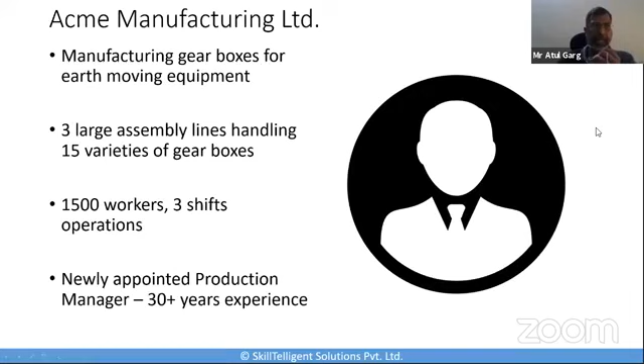So before we start with this whole Acme Manufacturing Limited case study, let us also try to understand what is a shop floor. We will also talk about what is to be managed on the shop floor, how do you manage it, and we will also touch upon some shop floor metrics to monitor. Okay. So before we start again with Acme Manufacturing, let's understand what is the shop floor.

In simple terms, shop floor is an area in a manufacturing facility where assembly or production is carried out either by an automated system or by workers or a combination of both. The shop floor may include equipment, inventory, and even storage areas. Shop floor may have 1 or more assembly lines, processing equipment, material handling system, and so on. That's how we normally define a shop floor. And this is a view of a large company's shop floor.

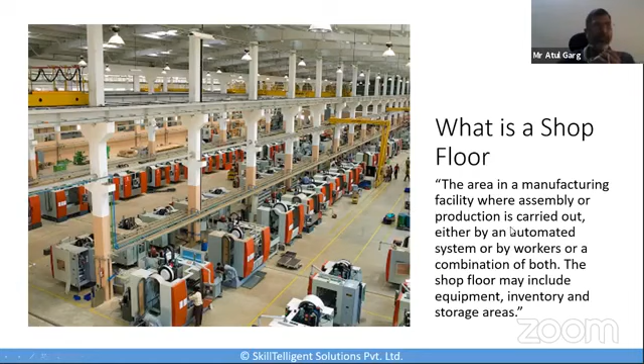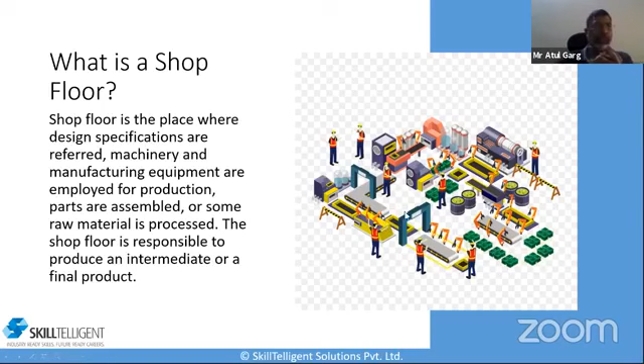Further, shop floor is also a place where the design specifications are referred, machinery and manufacturing equipment are employed for production, parts are assembled, or sometimes even the raw material is processed. So the shop floor is responsible to produce an intermediate or a final product. An intermediate could be a part, component, sub-assembly, anything which is not a final product yet. So that's what we call intermediate. So this is about a shop floor.

Let's also look into the types of shop floors, and we will generalize over here. A shop floor could, from the product quantity perspective, handle either small volume production or mass production. Shop floors are also designed from the process perspective to support either assembly, analytical, synthetic, or processing activities. Now, the analytical process would involve breaking a basic raw material into components which can be used independently. For example, a refinery would break down crude oil to get aviation fuel, petrol, diesel, etc. That's an analytical process.

Shop floors are also laid out either for the job shop, which is project-based or work order-based, or from the process flow angle, which is where you have continuous manufacturing happening on a mass production basis. So this is how we normally define the shop floor types.

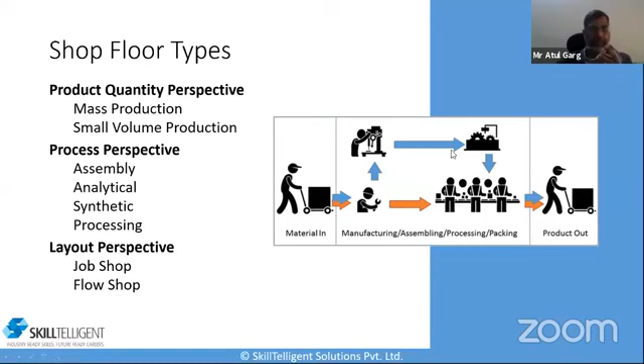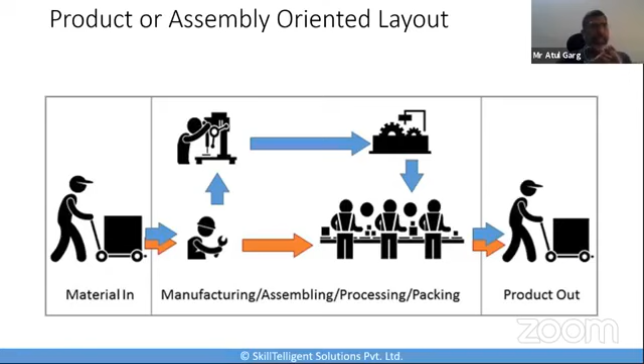A quick orientation to the shop floor layouts. This one which we are showing over here is an assembly or product oriented layout, and this is designed in a linear fashion. The next one which we have is a process oriented layout where a group of machines and tools that perform similar or all functions required to complete a single stage in a process are placed together in this layout. Okay.

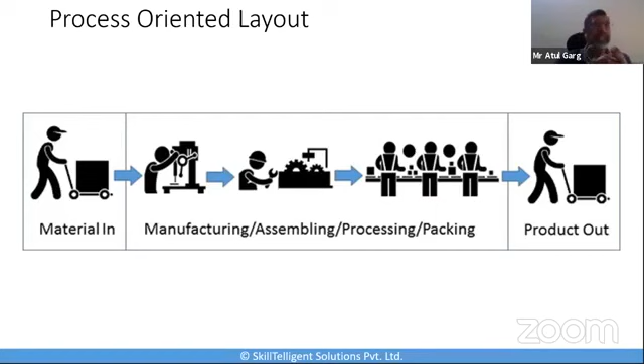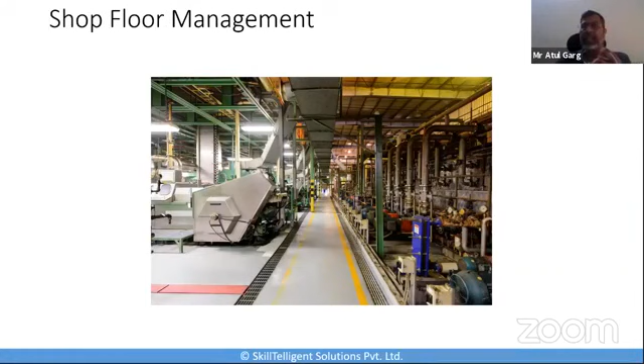So let's understand what is shop floor management, because shop floor management is concerned with several activities that enhance the shop floor efficiency. So keeping it simple, shop floor management shows us the ways to economically manufacture products of certain value and quality in certain volume and a certain time period. The process and practices involved in shop floor management help in containing wastage, costs, and standardizing work to ensure the timely delivery against the committed quality and quantity consistently.

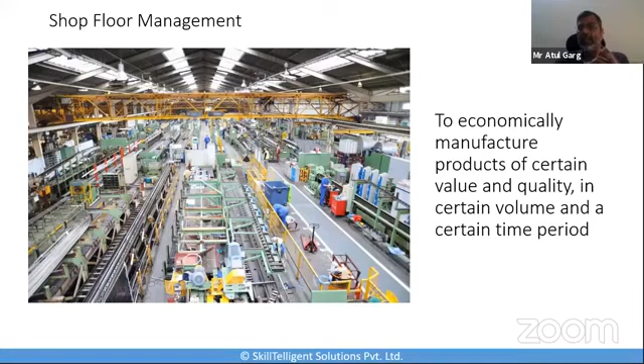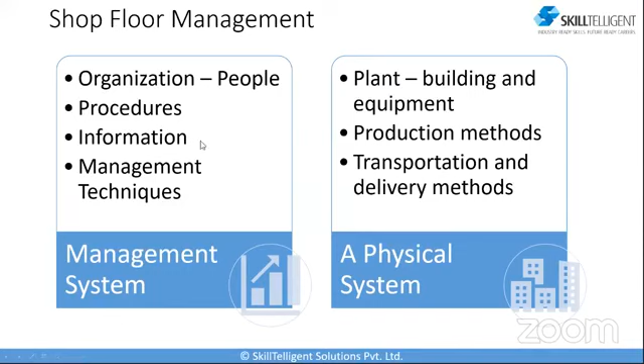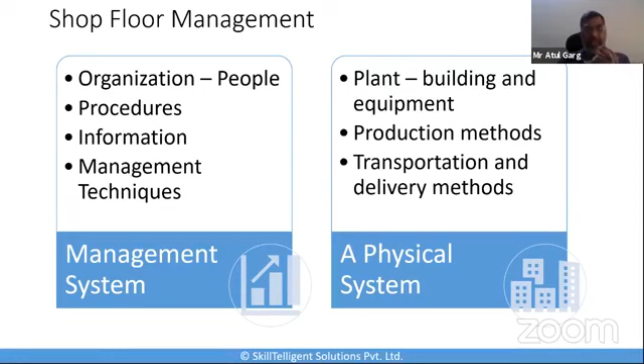Shop floor management overall is also about developing and controlling a management system and a physical system. So management system would focus on the organization involving people largely, procedures, information, and management technique, whereas the physical system would focus on plant, building, and machinery, production methods, and even the transportation and delivery methods. So that's how we distinguish between the shop floor management, one from the management and second from the physical system. And once you have these management and physical controls in place, it becomes very easy to manage the shop floor. Okay.

Let's look at some of the objectives of having a shop floor management. Why do we want to have the shop floor management? So first objective, routing and movement of the material on shop floor appropriately. Second is, how do we sequence the procedures and processes taking place on the shop floor? Third, how do we schedule the workforce, resources, and operations? Fourth, finding the deviation from standard procedures and processes, which is very important. And the fifth one is identifying the loopholes in the shop floor communication.

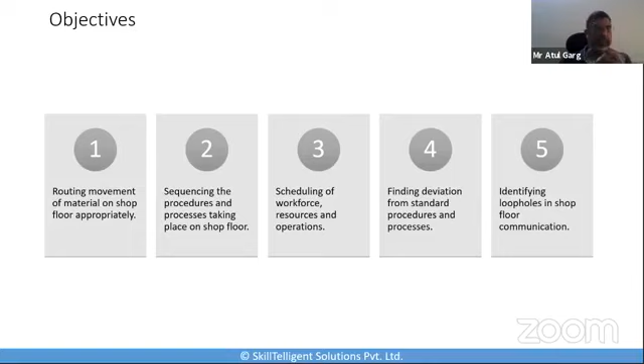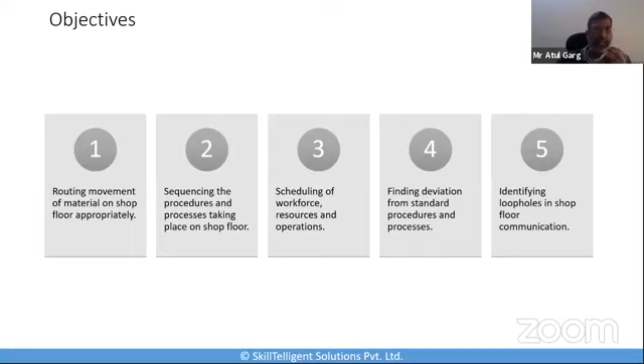Now, these are very important factors, and these are the reasons why we want to do the shop floor management. Even if the communication is not happening properly between the management and the workers or among the operators, the production can be disturbed badly. And if there is a deviation from the standard procedures and processes, it can lead to substandard manufacturing or maybe even delays in the manufacturing. Now, taking a context back of our Acme manufacturing, the new production manager whom we have hired over here would want to focus on all these objectives, because all of these objectives can impact the delivery schedules, and that's a major constraint to Acme manufacturing.

Okay, so if you have a good shop floor management system, what are the benefits? So first benefit is that it increases the operational efficiency because it uses the standardization of operations. And second, it helps in reduction in occurrences of errors in the work. Lesser number of errors occur if there is a standardization of the operations. And it also identifies and reveals the loopholes in the production processes, where again you can take corrective steps. All this always leads to the increase in productivity of the staff, and if all these things are happening by default, there is a positive impact on the revenue of a manufacturing business. So these are the benefits of having a good shop floor management system in any company.

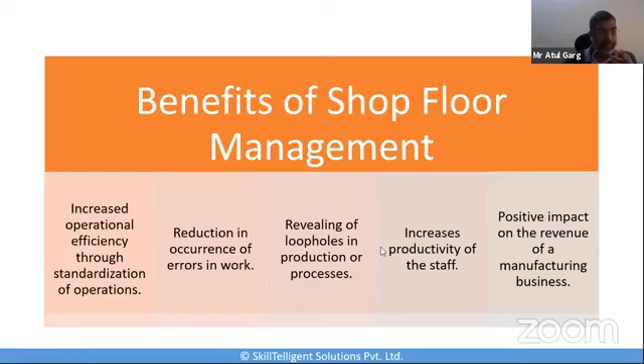Okay. Let's also understand the role of a manager who has to carry out the effective shop floor management in context. And let's again take a reference of the production manager over here. So production manager essentially has to perform certain roles. Let's look into what they are. Now, the production manager has to ensure, and he also knows well with his long and rich experience, that unless he facilitates the decision-making process at the lowest possible level of the organization, things will not move fast. And in the previous webinars, we have also talked about how the planning should be centralized, with inputs from all stakeholders, but the decision making should be decentralized on the shop floor, because this enables the effective and fast turnaround response to a situation.

Second, a manager or supervisor must lead the problem-solving activities in a multi-skilled and cross-functional team environment. This is also very important. This enables the effective and fast turnaround response to a particular situation. Okay.

The third thing is that the manager also has to ensure that for everything there is a well-defined standard process. So a manager's role essentially in shop floor management will center around these three principles. Decision making at the lowest possible level of the organization; he has to facilitate that. He has to lead the problem solving activities in a multi-skilled cross-functional team environment. And he has to ensure a well-defined standard process. Okay? So that's a manager's role in shop floor management.

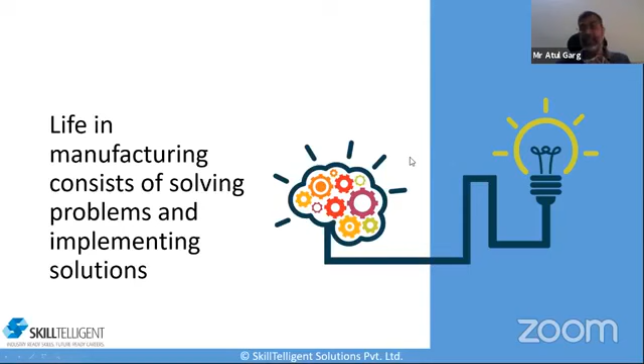So it's the inquisitive nature of the manager taking a structured questioning technique which will help him to find out what is happening and what is not happening. Okay. Remember that when it comes down to the shop floor or manufacturing, life in manufacturing is always going to consist of solving problems and implementing the solutions. Problems will consistently remain there, and you have to consistently find the right kind of solutions and one by one keep on eliminating them. So that's again a very important role for the manager.

Our production manager here has got a lot of experience, and he has learned lean. So he wants to implement lean practices at Acme Manufacturing to address their problems. He knows that when properly used and applied, lean transformation will lead any company to higher profits, greater business success, stability, growth, and profitability. Lean transformation is also a cultural change. It takes time and internal acceptance to build the right culture. So the manager has to very diligently work upon implementing the lean culture and bring about a change of culture in the organization to take it forward.

What is lean transformation? Lean transformation is essentially a practical management system based upon the Toyota Production System philosophy, where we say the customer is first, people are the most valuable resources, Kaizen, the continuous improvement that has to go on, and remain shop floor focused using Gemba. So that's lean transformation as TPS suggests. It is also a collection of best knowledge. Which are those? The business philosophies, operating principles, lean tools, and lean methodologies. So a combination of this practical management system and collection of best knowledge together is lean transformation. And that's what our production manager wants to implement in shop floor management here.

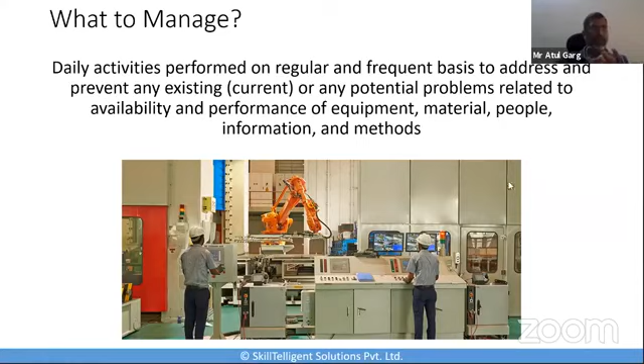In our case, our person decides to take three main steps to identify what has to be managed in Acme Manufacturing. The first step in shop floor management, especially for a new production manager, is always to understand the current processes happening on your shop floor. You just can't parachute in and say that you want to change everything, because things are already happening. You can only bring in incremental and correct changes, but you can't just trash everything and restart from the beginning. So our person starts with the 7 areas, and the first area he focuses upon to understand the current systems is safety.

He wants to understand the safety requirements in existence. Is it a safe place to operate? Is everybody following the safety regulations? That's the first area which he focuses upon.

The second area which he focuses upon is what is the work cell. He wants to understand and identify the cell layouts, number of machines and their functions, identification of number of operators and their responsibilities. He wants to understand the whole flow, the whole way in which the work is organized on the shop floor. So that's why he wants to understand the work cell.

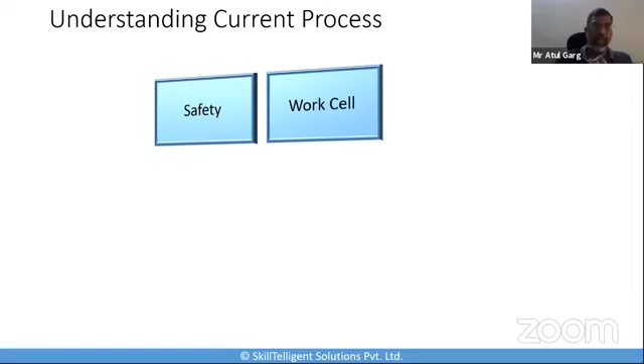Third, he wants to understand the manufacturing process. What type of gears are being manufactured and assembled in this particular work cell? What is the flow of work? What is the flow of the information? What kind of manufacturing systems are put in place, and so on. So that's the third area which he wants to understand on the shop floor.

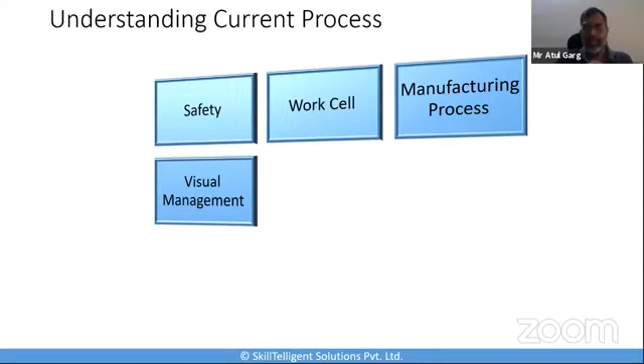Fourth, he seeks out what kind of visual management is in place and whether it is operating properly. He wants to review them for simplicity and ease of understanding, as well as whether they are being followed by everybody on the shop floor. A good visual management would cover the key control indicators for safety, quality, delivery, productivity, cost, and people. So he wants to review the existence of the visual management system.

And since this is all about managing the shop floor, stability of the resources, methods, processes, and machines becomes very important. So it is important that there is some kind of workplace organization method like 5S, so that the shop floor is stable. So again, he wants to review what kind of workplace organization methods have been implemented in Acme Manufacturing.

Sixth point, he's curious about how the information is communicated to the operators, whether there is any common information center where this information is put up, what the communication mechanisms are for letting the operators know, and how the details are shared with everybody involved in the manufacturing operation.

The last area of understanding is how the work cells are managed. He wants to understand how the work cells are operating, how people identify problems, and whether the work cell is managed in such a way that if there is any problem, it becomes visible, people are able to recognize it quickly, and the concerned supervisor is able to address it immediately. So that's the seventh area which he wants to understand.

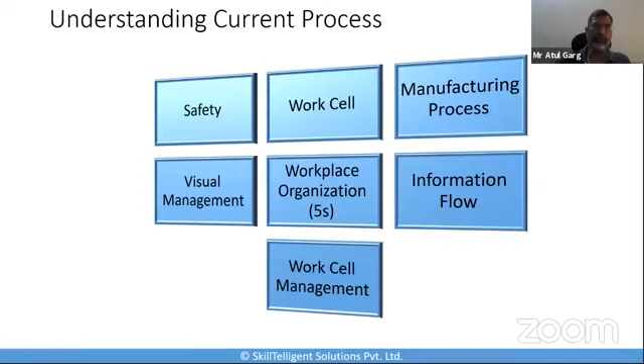So safety, work cell, manufacturing processes, visual management, workplace organization, information flow, and work cell management. These are the 7 areas where he focuses to understand the existing and current processes on the shop floor. So this is process number 1, which he goes through. The second important area is that

for any leader or any lean leader, what is important is that you should be able to go and see, ask why, and also show respect for the people who are working. These are the 3 principles on which lean leadership is built. Now, if you go and see, what do you go and see? What do you ask? So what is important here is that

in any manufacturing, over a period of time, waste generation starts taking root. Certain wastes happen as a habit, as part of a process, and so on. And sometimes even the flow gets disturbed. So it's very important that whoever is the leader or the manager of the shop floor has an eye for identifying the wastes and the disruptions to the flow of operation.

So it's very important that while he is focusing on multiple things, our production manager also focuses on discovering if there are any chronic wastes related to the standard 8 types of lean waste. What are those lean wastes? We'll just have a quick view of that.

The 8 lean wastes are defects, overproduction, waiting, unused talent, transportation, inventory, motion, and extra processing. I will not get into these 8 wastes right now, but these are the 8 wastes which happen on any shop floor. And that's what our production manager has to monitor, finding out whether any of these wastes are happening, at what level and in what quantity.

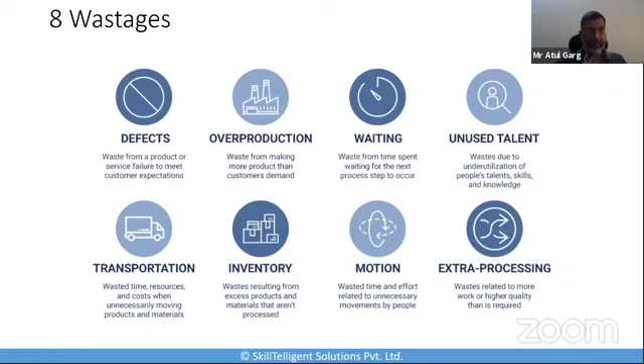Okay. Now, the other thing which he will also look into is that he has to focus on the type of the work being done. Whatever work we do, it has to be value-added work, because that's what increases the value of the product from the customer's point of view. And if you are doing any incidental work which does not have any value attached to it, but rather has a cost, we should work upon minimizing that.

Okay? If we have a higher value-added operation in completed work, then it brings a high level of production efficiency. So if you see over here also in the green, there is value-added work, there is some kind of waste or muda, and then there is some kind of non-value-added work. So our production manager's goal has to be to identify what the non-value-added work and the waste are and try to minimize them. So he has to have an eye for the wastage and identify that.

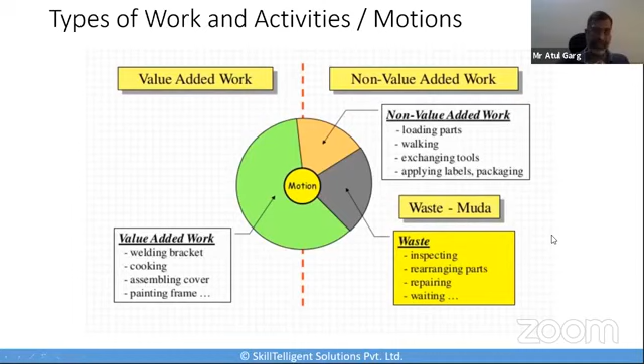Okay. The next focus as part of the eye for wastage and flow would be on the flow of production. So production managers should see if there are noticeable stops in movement of operations or movement of products and material, and whether the machines are working full-time properly or not. Elimination of stops and waiting time in a process is always a major concern of any shop floor manager.

The shop floor manager would always want the time for any individual person or an item to move from the start to finish of the process to be the shortest possible. Flow is all about how people, information, and materials move and interact with each other from the start to end of the production process.

Okay. The third area of focus would be the pace of production. You have to know whether the takt time is visible and whether everybody is following a pace of production. So what is takt time? Takt time is essentially the maximum amount of time in which a product needs to be produced in order to satisfy the customer demand. And we normally say takt time is scheduled production time in seconds divided by the total customer requirements.

What does takt time do? Takt time essentially creates a pulse or a rhythm across all manufacturing processes in a business and synchronizes the processes to ensure continuous flow of production and utilization of capacity. Once the pace or takt has been determined, the next major step is to design a system that flows product at the same rhythm as that takt.

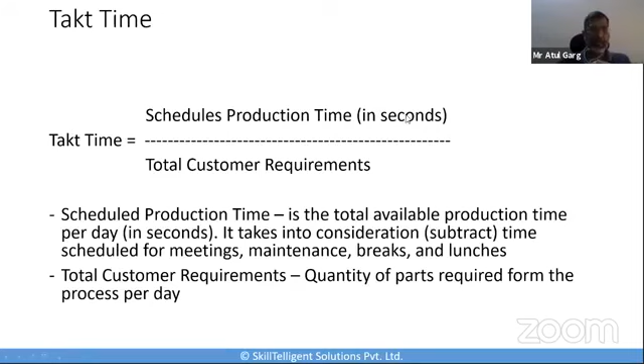So our shop floor manager now focuses on determining if there is standardized work in place and whether operators follow the standardized work. And the other thing he focuses on is whether there is parts presentation. Parts presentation means a well-defined standard in-process stock. If a parts presentation method exists, then whether it is controlled, and if there is a problem with the material, what steps are being taken to manage it.

Let's understand what this parts presentation is. This basically is standard work in progress inventory. It allows the operator to do his job continuously in a set sequence, repeating the same operation in the same order, and it also prohibits the operator from overproducing and requires him to produce what is needed, when it is needed, and in the amount it is needed.

If the parts are not available in time, production will be hampered. And if there are too many parts lying around, there may even be overproduction. So the right standardized work in progress quantity has to be maintained on the shop floor. Remember, lean is not about inventory reduction, but about identifying how much inventory I need to operate efficiently and effectively. So this is what we apply through the standard WIP or parts presentation approach.

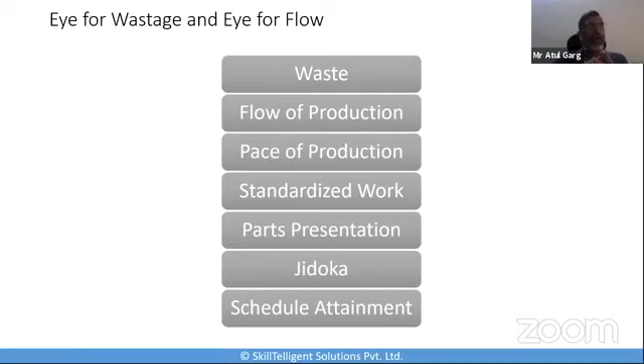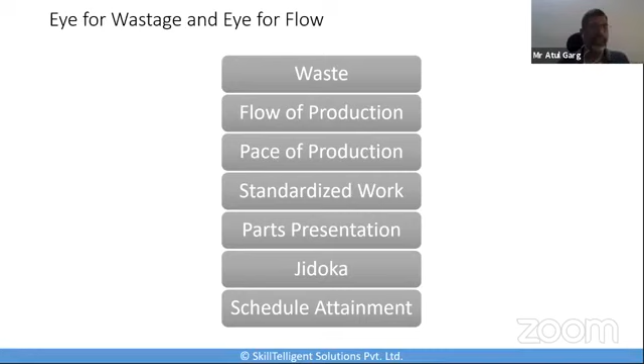So again, back over here, the shop floor manager has to look around and identify if there is a wastage happening on the shop floor, if the flow of the production is smooth or not, the pace of the production is being maintained as per the takt time defined, and it is moving with a rhythm. The work has been standardized. The standard work in progress inventory is available. There is a Jidoka or autonomation system available to prevent the mishaps, and whether the schedule is being maintained and being followed for the commitments to the customer. So a shop floor manager has to have an eye for these kinds of areas and use them to manage the shop floor. So that's a second area.

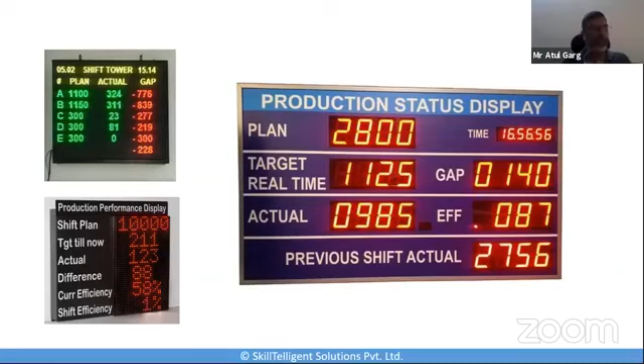The third area with the production manager, sorry, before I go into that, these are some of the production electronic status boards which can be used even to find out whether you are behind the schedule or you are on the track, and if you're behind the schedule, how much behind you are, so that you can take the corrective actions. Okay. So the third area which the production manager focuses upon is to review how much work is standardized.

So the first item on his list to review is: does the team hold the daily team meetings on the shop floor? Whether they are conducted or not, who leads them, what is discussed in these daily team meetings, and how long do they last? Are the team meetings happening for 2 hours, or are they getting over in 10 minutes, 15 minutes? All these details he wants to understand and then see how to improve upon it.

Second, he would focus upon the management walkabouts. It is always good to know whether the daily management walkabouts process is taking place or not. Is there a schedule? Is there an agenda for these management walkabouts? And who is doing these kinds of walkabouts? Third thing, has the management established key performance indicators, and have they been defined for all the levels of the organization? And whatever KPIs have been identified, are they easy to understand and to follow?

So the fourth area he focuses upon is how the Acme Manufacturing shop floor team deals with abnormal situations. These abnormal situations could be anything like breakdowns, part shortage, a quality issue faced, attendance, people not following the standardized work, and so on and so forth. Any of these things would require troubleshooting that abnormal situation. So what is the process for that, and does Acme Manufacturing follow a standard method of dealing with the abnormal situations?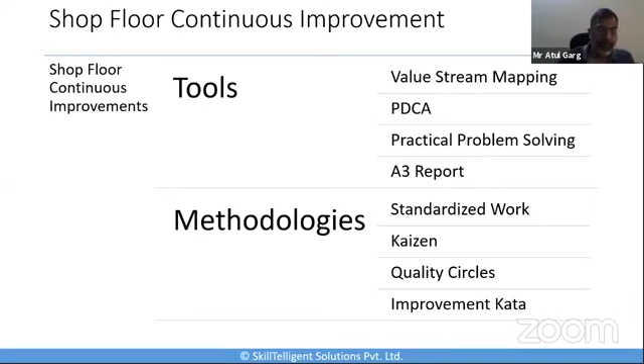Another important part of the shop floor is training. It's a very crucial element of shop floor management. Every new employee must be formally inducted and oriented in the company rules and regulations, do's and don'ts. He must be oriented on the safety rules, precautions, and the existing systems of the company.

Each shop floor employee must be taught about the operations and activity norms for each operation and job role he has to perform. And any improvement brought in process or method, via either Kaizens or quality circles or anything else, should be percolated to everybody involved via the one-point lessons method. Toolbox meetings must be regularly held, focusing on operational safety.

5S and visual management and other lean tool training must be given to everybody. People must know what these tools are and how to use them. And continuous improvement activities, like how to do Kaizens, how to carry out quality circles, how to analyze problems, how to do the CAPA and RCA and so on, must all be taught to everybody, so that everybody is proficient to carry out these activities and continuously improve.

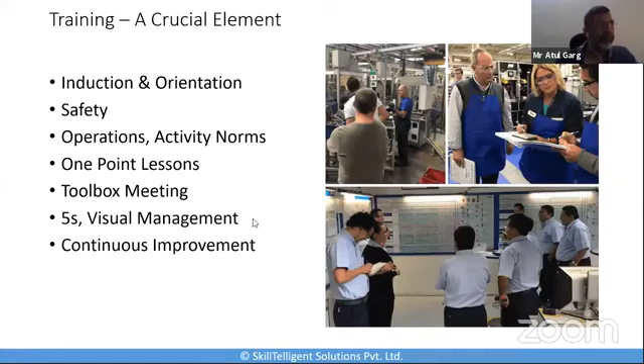We will briefly touch upon the various shop floor metrics which you can also establish, and if you have a good set of shop floor metrics, they will also help you to manage your shop floor, because they will tell you what is happening and what is not happening. For these metrics, normally we focus upon safety, quality, delivery, productivity, cost, and people. I'll just name some of the metrics which can be defined.

In safety, we could talk about the number of near misses, number of accidents, number of consecutive days without an accident. In quality, we can talk about scrap generated, process defect rates, reworks, repairs, process capability, and so on. In delivery, we can talk about schedule attainment, quantity, date and sequence, utilization rate, delivery date, fulfillment rate, daily delivery rate, delay rate, and so on.

In productivity, we can have metrics like quantity produced per unit time or per man hour, lead times, number of times each unit is handled by the operator, machine downtime, and so on. For cost, we could look into material cost, labor cost, expenses, cost per unit, cost of quality, cost of poor quality. We can look into those costing factors.

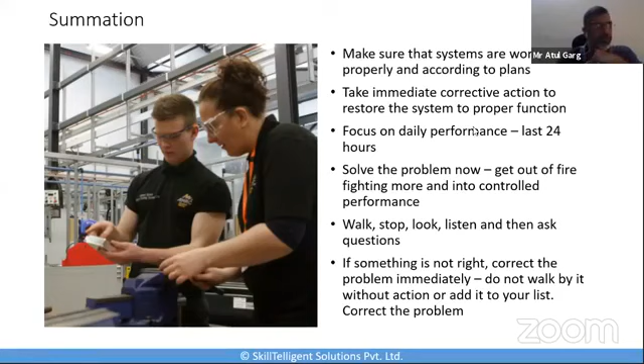If something is not right, again and again, this commandment will keep coming back. Correct the problem immediately. Do not walk by it without taking any action. Do not add it to a to-do list. Correct the problem. So again, shop floor management is all about immediately taking the right action, not delaying the corrective action, and always remaining open to find out what else can be improved upon and how. So that is what our shop floor manager also talks about over here.

Okay. So if we summarize what we talked about, shop floor management would involve management on the site in production, communication at the eye level with the employees. There has to be a good visualization which shows the production systems and the status, utilizing various factors. There has to be structured problem solving, and if possible, the employees should be solving the problems independently. There should be continuous improvement process.

There should be lean culture into it, and overall, one has to be very clear what has to be managed, understand the current process, have eye for the wastage and flow, manage the daily operation, and ensure continuous improvement on the shop floor. So this is what overall shop floor management is about.

Shop floor management is actually a very vast subject, and while we can do generalization in terms of the tools and methodologies, its implementation will always vary based upon the type of manufacturing, shop floor types, and layouts and the size of operation.